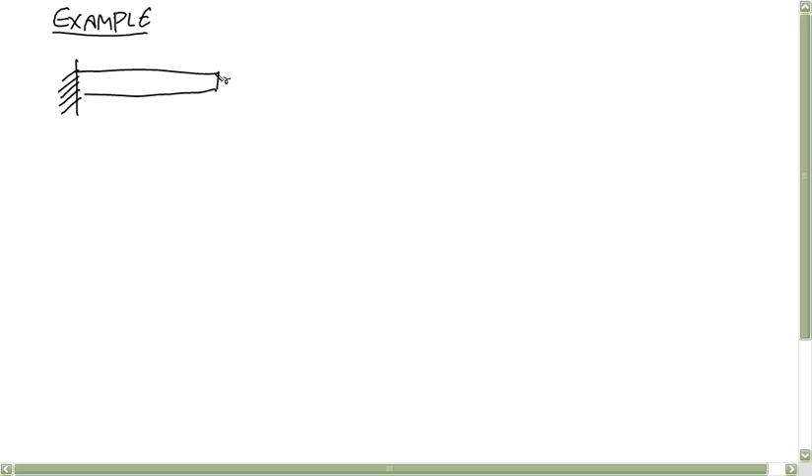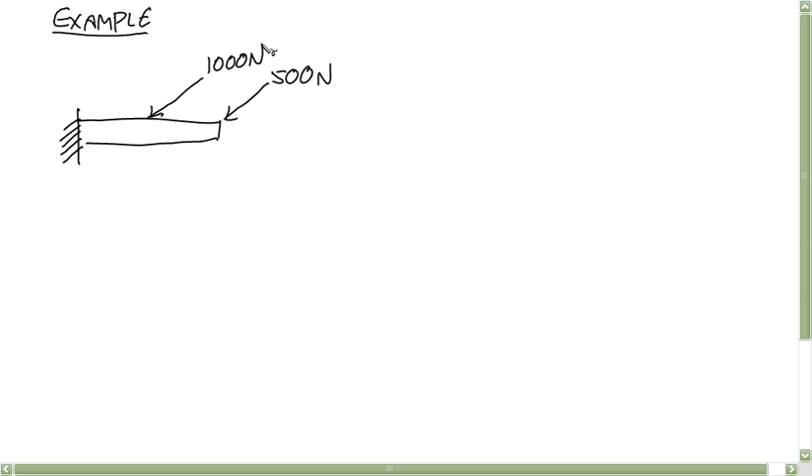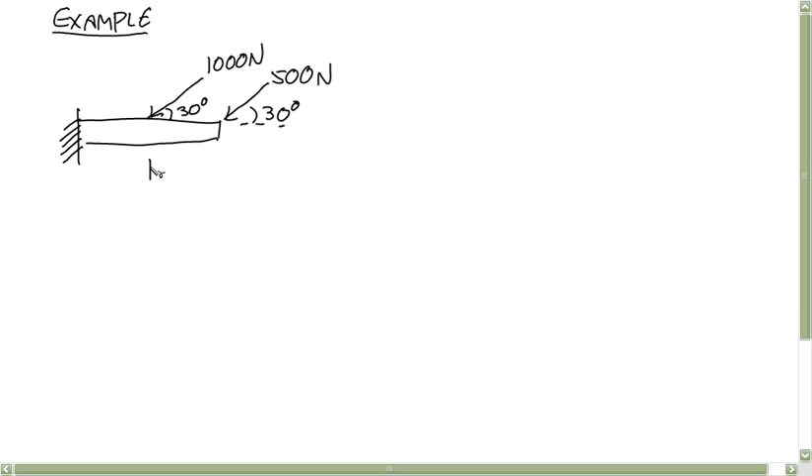Okay. So let's say that we have a cantilever beam that's straight. It's glued or fixed to the wall. It can't rotate or translate. And there is a force acting like this of 500 newtons and a force acting like this of 1,000 newtons. And each of those is at 30 degrees. And the lengths that we need: there's 1 meter from the wall to this first force and 1 meter from the first force to the second force.

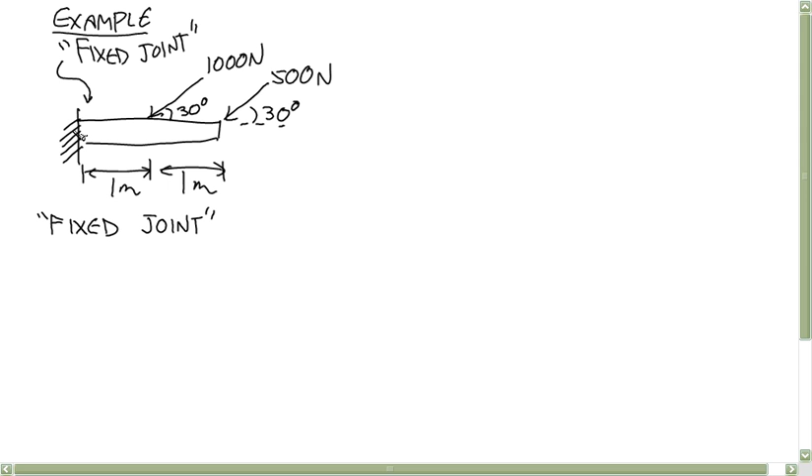And this joint is called a fixed joint. A fixed joint doesn't allow any translations, right? You try to move this thing to the left or the right or up or down, and it won't do it. And it doesn't allow any rotations. So it makes sense that in order to prevent translations, you're going to need to apply force components. And in order to prevent rotations, you're going to need to apply rotation components, moment components, okay? And it's actually couples. So a fixed joint applies a full force vector. What a full force vector is depends on whether you're in 2D or 3D. In 2D, that's just two components.

And a full couple vector. And because of that little example I did last time, when I talk about a couple, I'm just going to represent that as a pure moment that doesn't have an about point associated with it, okay? So that's just a moment that we're going to add to all the rest of our moments in the rotational version of Newton's law, no matter what we choose as our about point. So that's a couple.

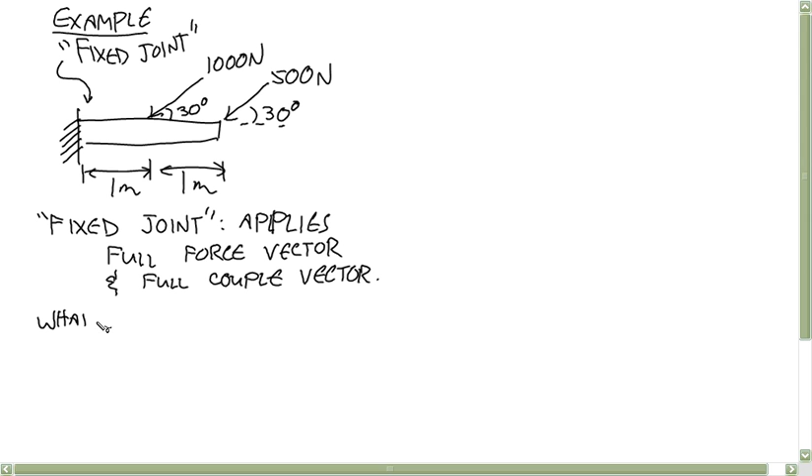And we want to calculate the reaction loads at the wall. What are the wall reactions? So we want to find that force vector, and we want to find that couple vector. In 2D, that couple vector just has one non-zero component, the z component. So it's 3 non-zero values that we want to find in a 2D problem. Okay, so before we can use Newton's laws, we have to start with a free body diagram.

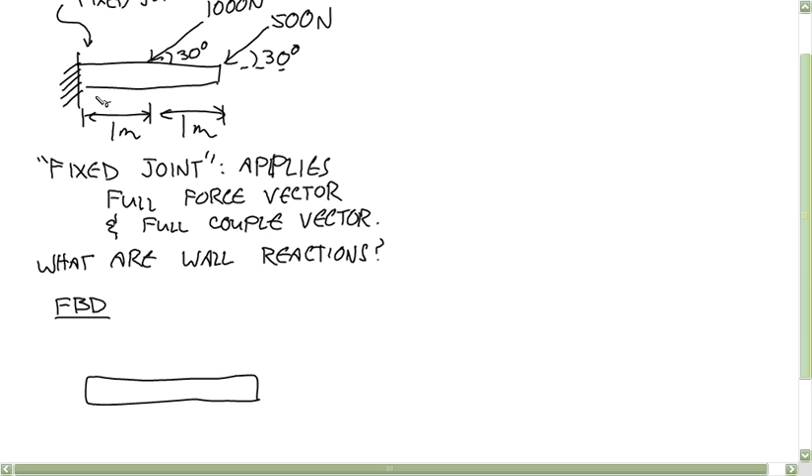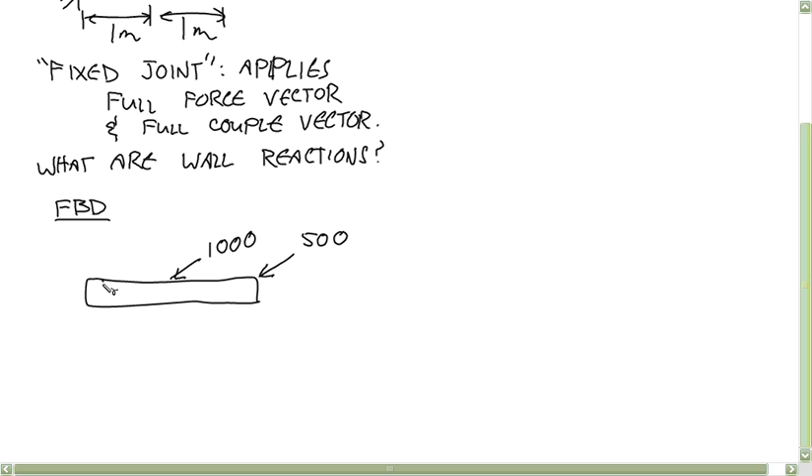And this is not a free body diagram, right? I said before that a free body diagram in this class has to be nothing but an outline of your isolated object with loads acting on it. So here's the isolated body, and the loads are 500, 1,000. And then I'll put a coordinate system here. And there's also a load, a force that I'll say is acting right there.

And that's the force applied to the body by the wall. Since it's an unknown force vector, I'm going to use that subscript notation: on the body by the wall. And then there's also a couple applied by the wall to the body. I'll represent it like that in 2D. In 3D, by the way, I'll represent couples like this with little doubled arrows. So that's if it's 3D. Okay, that's a full free body diagram.

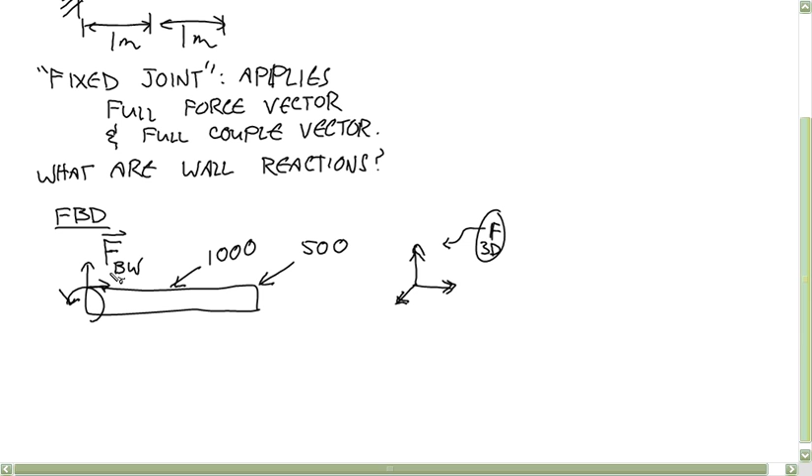So now we're going to go from here to Newton's second law and the rotational version of Newton's second law. In order to do that, I'm going to fill out that table that I talked about with moments, and we're going to see how filling out that table just makes it really easy to fill out the left side of both of those Newton's second laws.

Okay, so for each load on this body, we're going to enter where it's applied, the about point for calculating our moments, because we need to be consistent with our about points for all the moments. And then the rho vector, which is p minus a.

Then the force vector, and then finally the moment about a. So I'll just start over here and work my way to the right. I guess I'll start with that couple. I haven't named it yet. Let's call that M, the moment on the body by the wall.

Okay. And in fact, so when I use couples, if my couple is represented as a vector variable like this one is, well, I'm being a little, in 2D, the equivalent of a full vector unknown couple is just a single value. So I'm writing this as just a scalar, but anyways, couples also obey Newton's third law. So if you have a couple applied to B by W, that's equal to negative couple applied to W by B. And that's why I'm going to use that subscript notation on the couple. And it makes sense that that would hold, right? Because these couples, even though we're treating them as just pure moments, they really are just combinations of forces. And you know that equal and opposite applies to every force, so it has to apply to the couples as well, right?

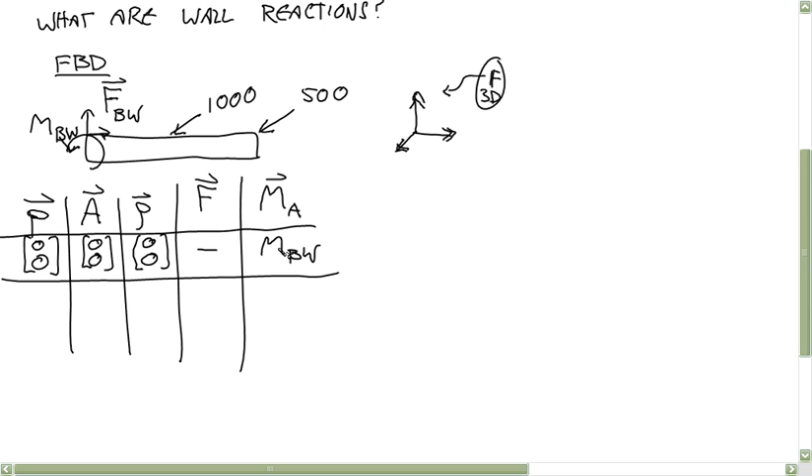Now we'll go to FBW. That also is applied at the origin. The about point. Now notice on any one of these tables associated with a free body diagram, your about points for every load are going to be the same thing, right? So rho has to be zeros. The force vector here is FBWX, FBWY. And then the moment applied by that force about, yep.

Now this force, that acts at 1, 0, right? 1 meter over. The about point still has to be 0, 0. And of course, you don't have to, there's nothing that says your about point has to be the origin, okay? We could have made the about point 50, 50 or something. The one thing you just do have to do is whatever your about point is for this, it has to be the same for this and this and this. So 1, 0 minus 0, 0 is 1, 0.

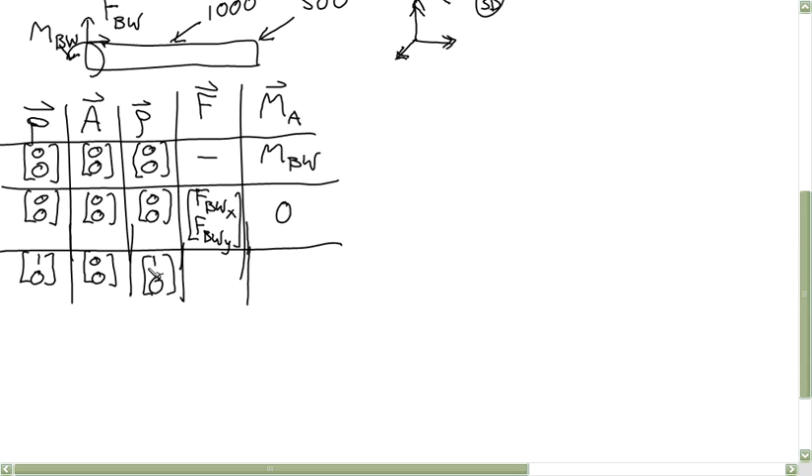That force is, since that's 30 degrees, we have negative 866, negative 500. And now this is going to be our first non-zero moment about A. 1 times negative 500 minus 0, so negative 500.

And then the last one is this 500 Newton force. That's acting at 2, 0. The about point is still 0, 0. Rho then is 2, 0. If you do that trigonometry for that 30-degree angle, you get negative 433 and negative 250. So 2 times negative 250 minus 0, so another negative 500.

Any questions so far filling out that table? Any statements of fact or frustration? Humiliation? Mike? No? Not yet. Okay.

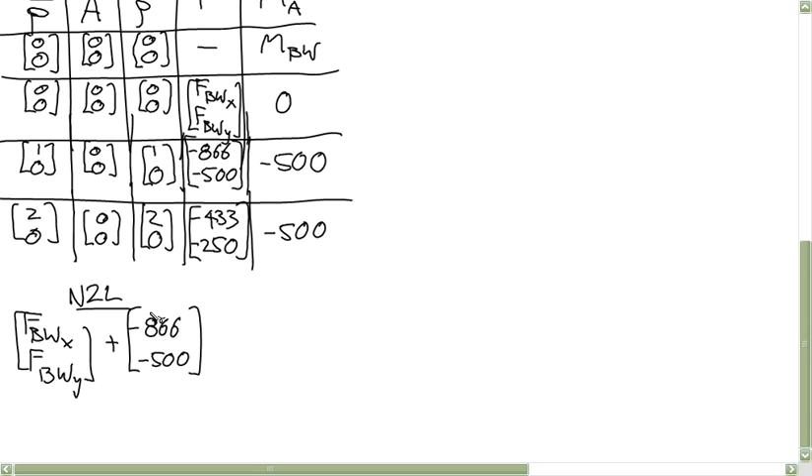All right, so now we're going to go from the table to the two versions of Newton's second law. First, the translational Newton's second law, the real Newton's second law. And in order to put these force vectors on the left side, you're just going to go straight down the force column of this table. So we have FBWX, FBWY plus negative 866, negative 500 plus negative 433, negative 250. That's all the forces. So since it's in static equilibrium, that's all equal to 0. Otherwise, it would be equal to ma.

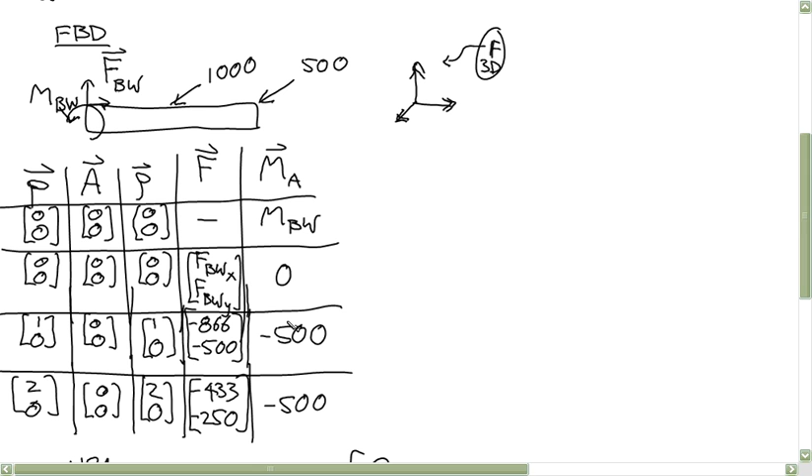And then the rotational version of Newton's second law about A. Now we're just going to go down this side. If it's a 3D problem, these will have to be represented as vectors. In a 2D problem, in my other examples, I put everything as 3D vectors with just zeros in the z component, where the only non-zero component was in the z, right? So it's fine with me either way you represent it.

So for the left side of this, we have MBW minus 500 minus 500 is equal to 0. So that's 3 equations, 3 unknowns. And this one you don't have to really solve as a system. Every equation just has its own variable.

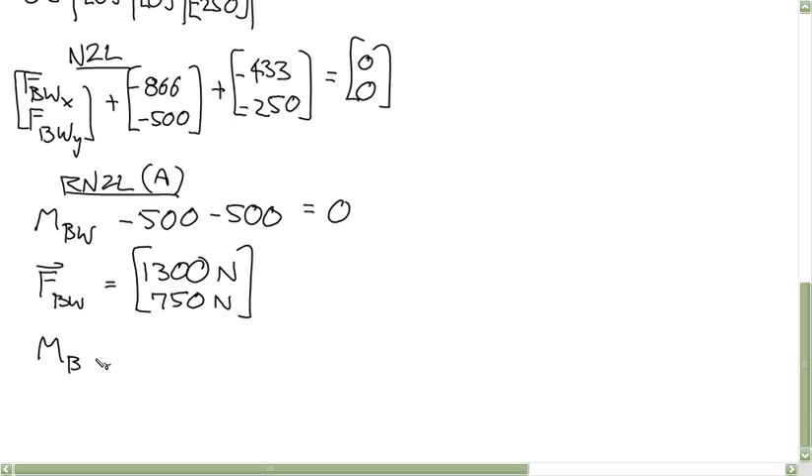So we get the force vector FBW is equal to positive 1300, positive 750, and that value, the value of that couple, the moment produced by that couple, MBW, is equal to 1,000 Newton meters. Okay, so

Let's interpret this. This force on the body by the wall is mostly to the right, and also somewhat up, right? So let's look at the picture and make sure that makes sense. These forces are pushing down and to the left. So in order to counteract that, there have to be forces to the right and up. So that makes sense, right?

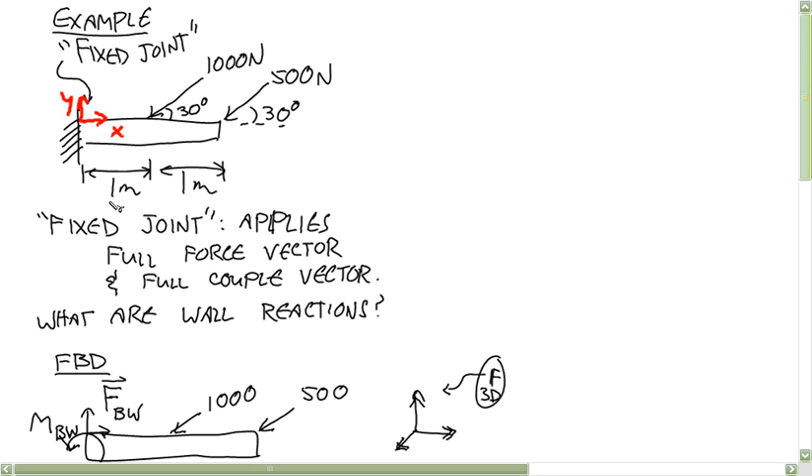And then look at the couple that's applied. Well, both of these, you can imagine, would tend to rotate this body this way, which would be a negative moment component. So to counteract that, we need to apply a positive moment, a counterclockwise moment. And that's what we have. Positive couple applied by the wall.

And then if you wanted to know what's the force applied to the wall by the body, it's just negative of this. So negative 1,300 newtons, negative 750 newtons. And how about what's the moment applied to the wall by the body? That's just the opposite of this, negative 1,000 Newton meters.

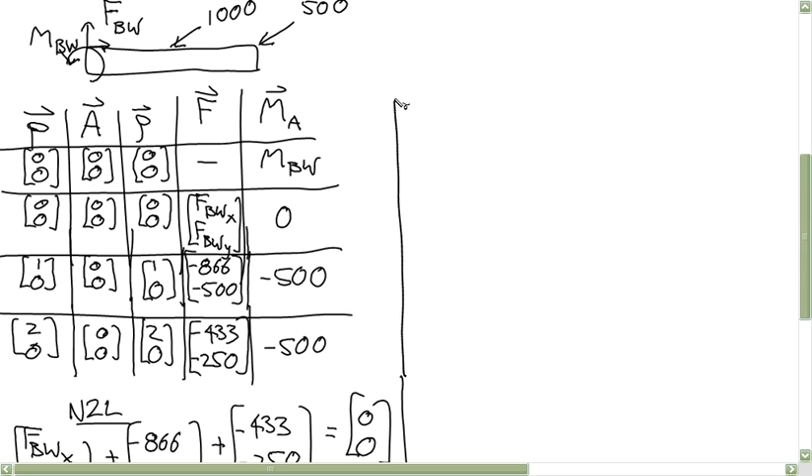All right, let's do another example. So this time, we have a beam that's attached to the ground by a hinge joint on the left, and it's attached to the ground by rollers in the middle. Between the end point and the roller, we'll say is 1 meter. Between the rollers and the other end point is another meter. And let's say that there is a force applied at the end at an angle of 45 degrees of 1,000 newtons.

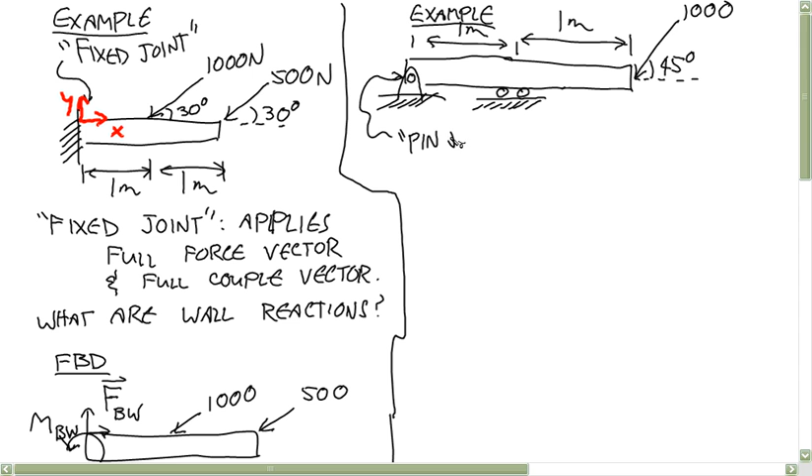Over here, this is a pin joint, and this one is a roller. So in order to figure out what kind of loads those two joints, the pin joint and the roller, apply to that body, we need to think about how motion is restricted by that joint. The pin joint, it lets any rotation happen, right? So it's not going to apply a couple, but it doesn't let this beam translate this way or translate this way. So this pin joint is going to apply a full force vector to the body.

And this roller, if this joint wasn't here, it would allow rotation. I guess you sort of have to think of this as maybe a single point, even though they'll often be drawn with multiple wheels or something. You can just think of it as like a single point that it's making contact, okay? And at that single contact, this body would be allowed to rotate, right? So it's not going to apply a couple. This body would also be allowed to translate side to side, left to right, but it wouldn't be allowed to translate up and down. So this roller just applies a single force component, a force along a line, and this might take a little thinking to make sense of this, but it applies a force along a line that's normal to what it's rolling over, okay? I'll say normal to the ground.

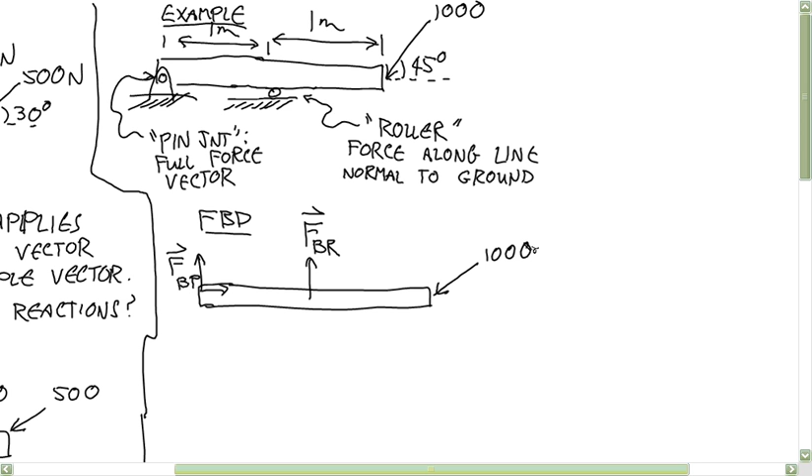So now we can go to the table. So first is the point where the forces are applied, the about point, rho vector, force vector, moment about A.

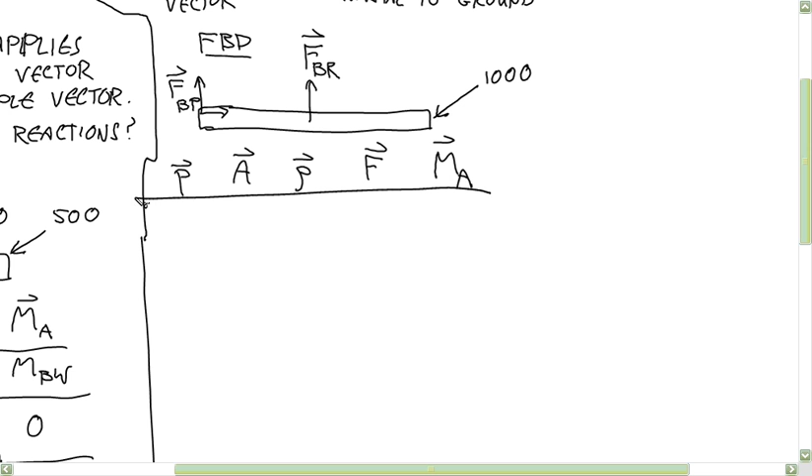We have to choose an about point. By what I said last time, it would make sense to choose an about point here or here. I'm going to choose this one. Can anyone think of a reason why? Two variables? Yeah, two variables. So there's two variables we're getting rid of if we put it here in the moment equation, as opposed to one variable here. Exactly. So our about point is going to be, I'll put the coordinate system here again.

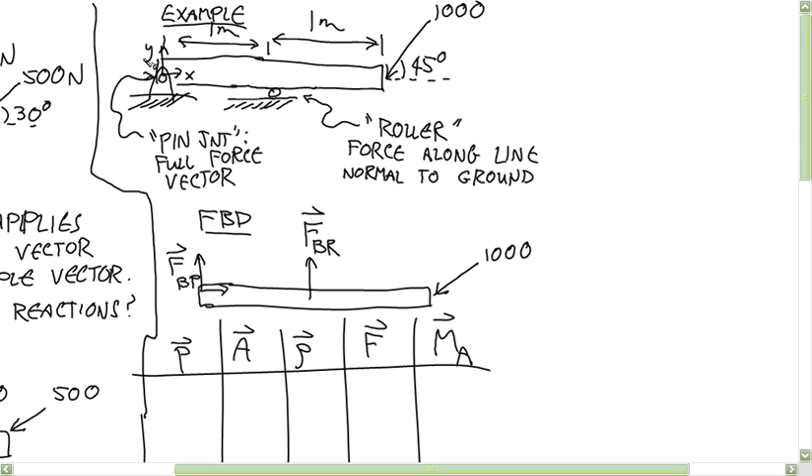So our about point is going to be 0, 0, 0. I'm going to write it all in vector form this time. It means the same thing as the form of the previous one. This force, FBP, is applied at the origin. That means the rho vector is zeros. The force is FBPX, FBPY, 0. And the moment is 0, 0, 0.

Now the force from the roller, that's applied at 1, 0, 0. The about point is zeros still. So the rho vector is 1, 0, 0. That force vector is 0, FBR, 0. And so the moment about A is 0, 0, FBR.

And then last, this force on the end, that's applied at 2, 0, 0. About point stays the same. The rho vector is 2, 0, 0. The force is negative 707.1, negative 707.1, 0. And so that moment is 0, 0, negative 1414.2.

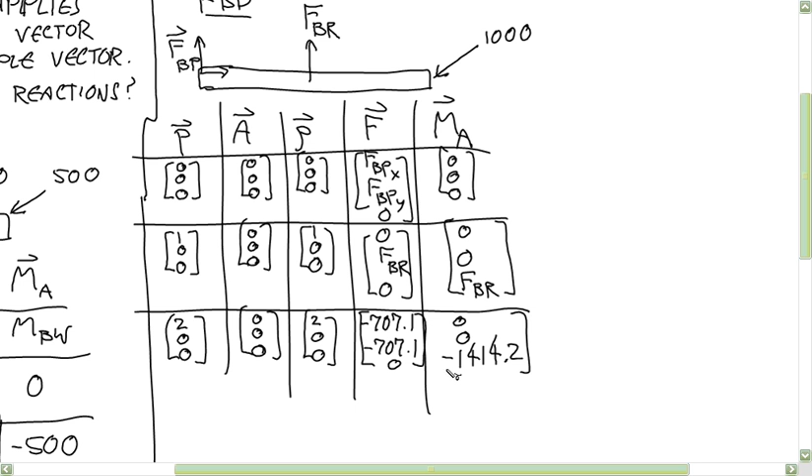All right, so now Newton's laws. First, we're just going to go straight down and add up the forces. So we have FBPX, FBPY, 0, plus 0, FBR, 0, plus negative 707.1, negative 707.1, 0, equals all zeros.

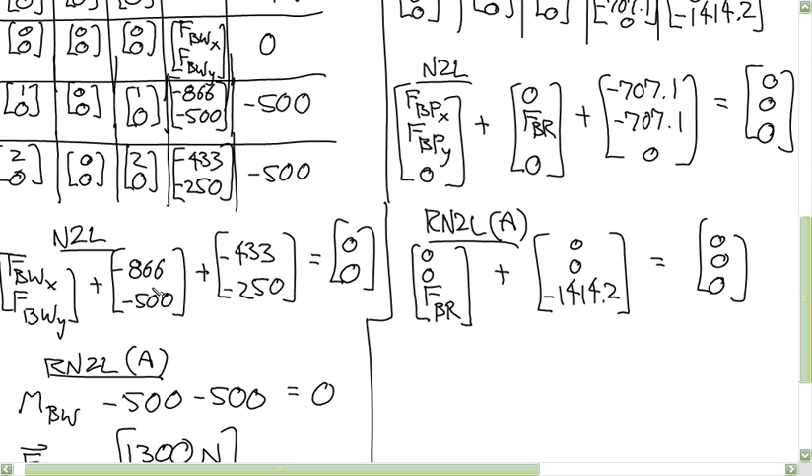And then rotational Newton's second law about A. We have 0, 0, FBR plus 0, 0, negative 1414.2 is equal to 0, 0, 0. I did it in vector form that time. You can see it comes out giving you the exact same information, even though we did it as a 3D problem. So we have 6 equations. 3 of those 6 equations are useless because there's nothing but zeros in them, and we just end up with exactly the same thing we ended up with doing it as a 2-dimensional force vector and a 1-dimensional moment vector.

So solve this system. This time, it's a system, but it's simple. You can still do these easily by hand, but I would get in the habit of entering these as matrix equations. Just make sure that you know how to do that on your calculator. But the solution comes out to FBR is positive 1414.2 newtons, and the force vector on the body by the pin is positive 707.1, negative 707.1.

Okay, so that one at first glance isn't quite as obvious, but it makes sense if you think about what's happening physically. These two forces together have to counteract this force, right? But since this one can only act as sort of a fulcrum for this end, on the left it also has to fight this rotational tendency produced by this one. That's why you end up with the downward force component at that left end side.

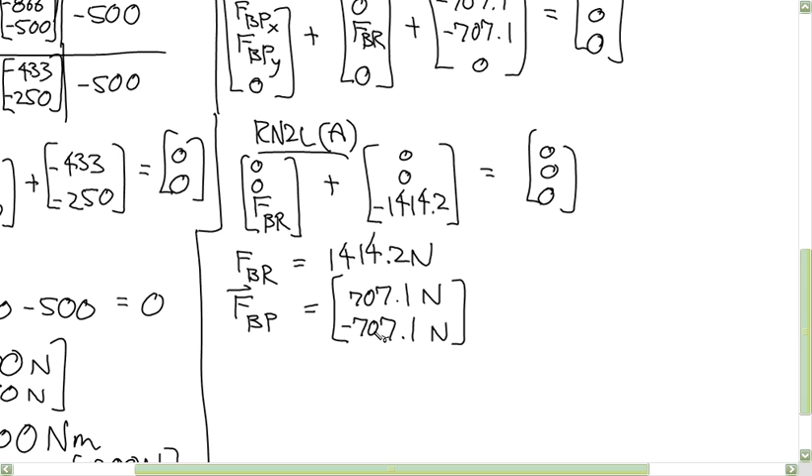Isn't the Y component, does have the FBR in it too? Yeah, that's right. This force FBR, the force vector FBR, is just upward. It's a 0 x-component and a positive y-component of 1414. So it's pushing up. And yeah, mathematically, you could say that's the explanation, but at first glance, yeah, okay.

All right, so these two examples, besides just being practice at seeing we're going to do this type of stuff over and over again, you can see that setting up the free body diagrams and setting up Newton's laws depends on representing these joints correctly, right? If we, for example, had treated this joint as if it produced a couple, we would have ended up with an indeterminate system, and that's a problem.

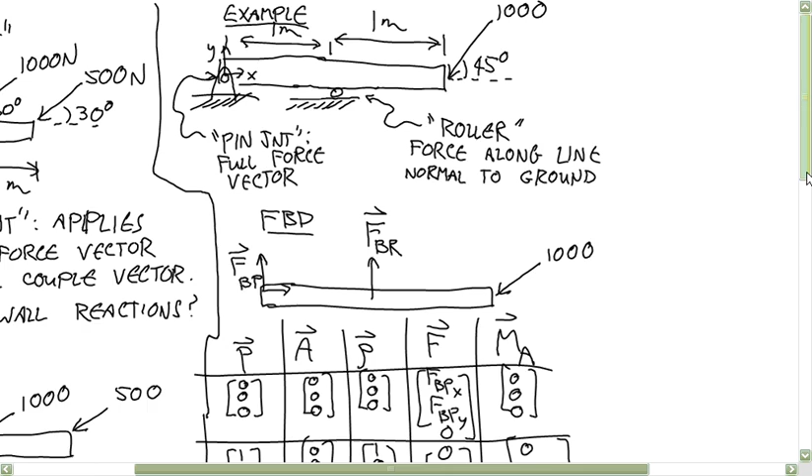So solving these problems requires treating the joint loads correctly. So now I'm going to talk about how to know what loads are applied by what joints.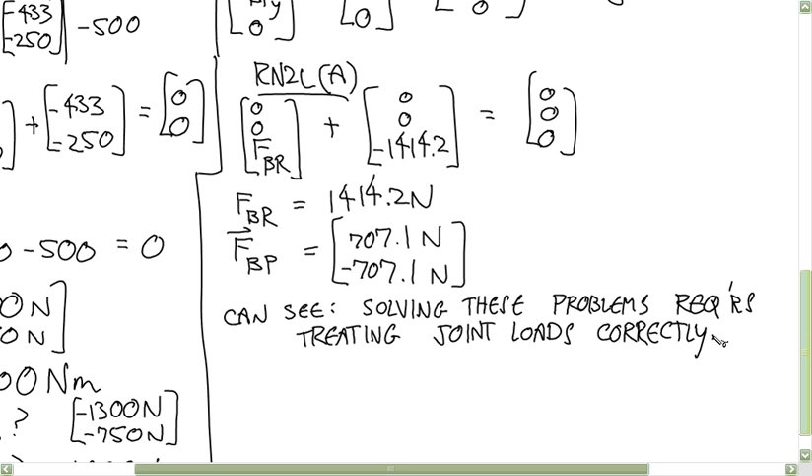Any questions before I go on to this about either of those two problems? So think of a joint, for our purposes, not as something that allows certain motions. Think of it as something that restricts certain motions, okay? So think of a joint as something that restricts the motion of some chosen body relative to another body. Often that other body is going to be the ground, but sometimes it's going to be something else.

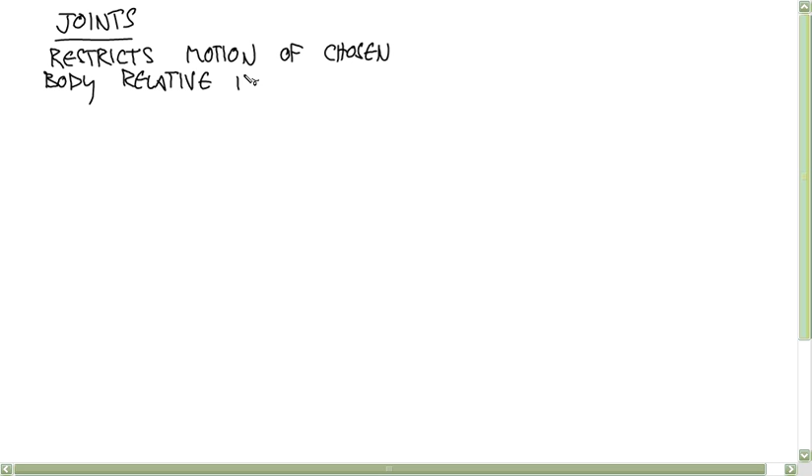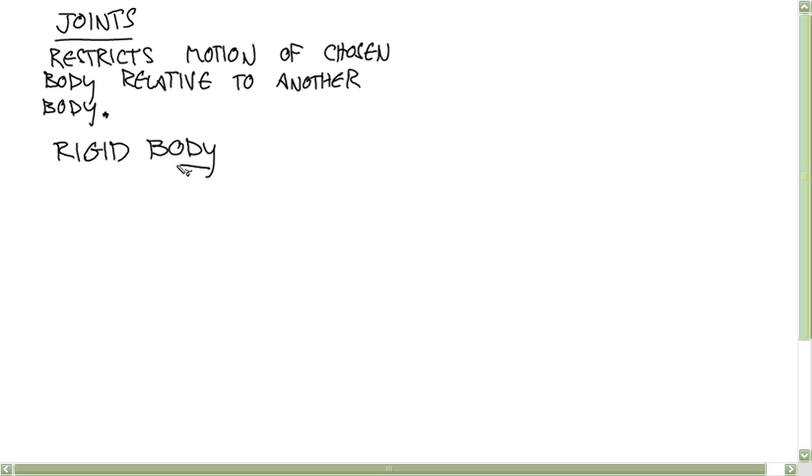So what if there's no joint? What kind of motion is allowed by a body that's totally free? So a rigid body in 2D has 2 degrees of freedom in translation. It can move in translation along the x-axis or translation along the y-axis. And it has 1 degree of freedom in rotation. It can rotate this way, okay? In 2 dimensions, this thing can't rotate about the x-axis or the y-axis.

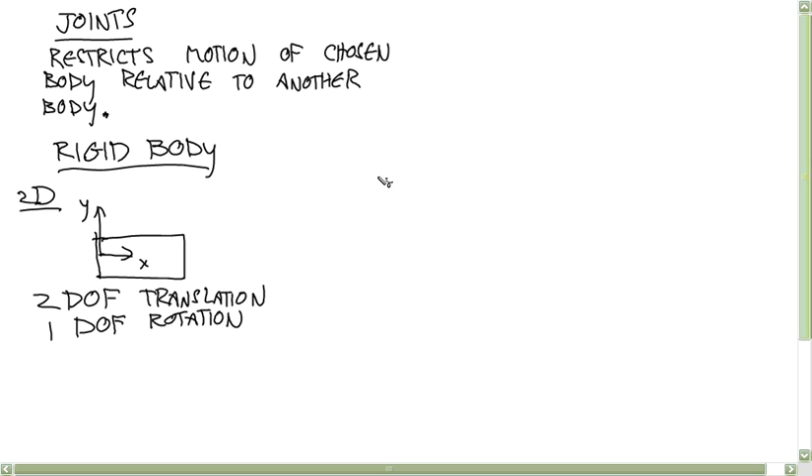So this is 2D. In 3D, this is harder to draw.

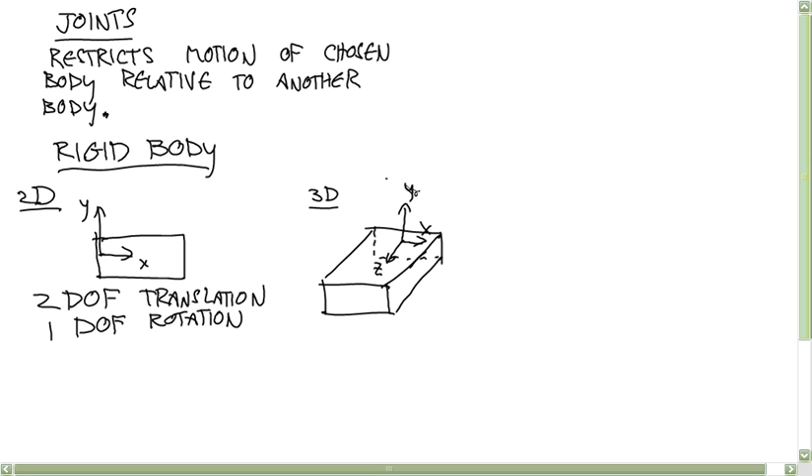So say there's your X, there's your Y, and there's your Z. You have 6 degrees of freedom because you can translate along X, Y, or Z. You can also rotate about X, Y, or Z. So this one has a total of 3 degrees of freedom in translation, and another 3 in rotation. That gives you a total of 6 degrees of freedom.

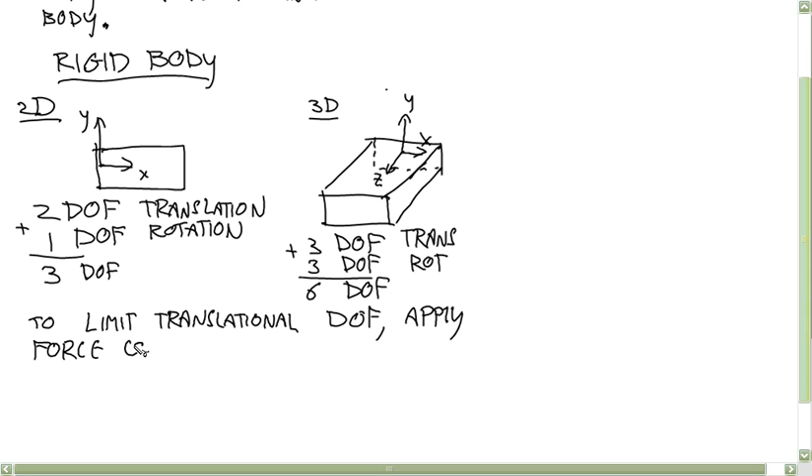To limit translational degrees of freedom, in either case, you have to apply a force, a component of a force, along that chosen axis. And to limit rotational degrees of freedom, you have to apply a couple component.

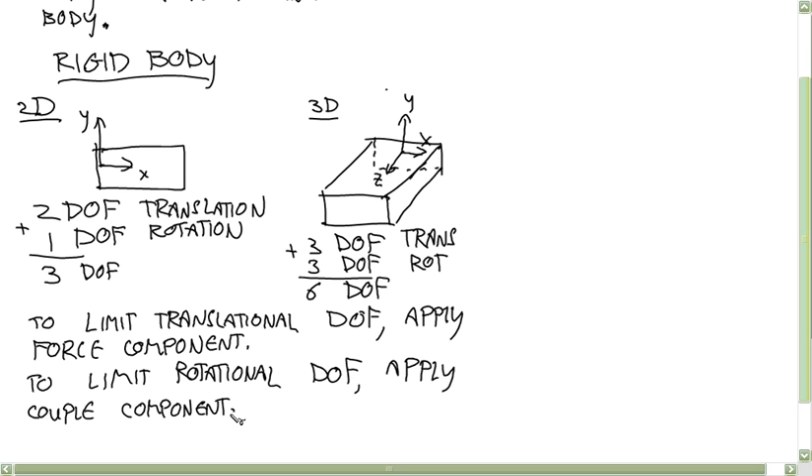Okay, so there are a bunch of types of joints that we're going to see a lot of. Here are some of them. Some you can use in 2-dimensional problems. Some only make sense in 3-dimensional problems. Some sort of make sense in either.

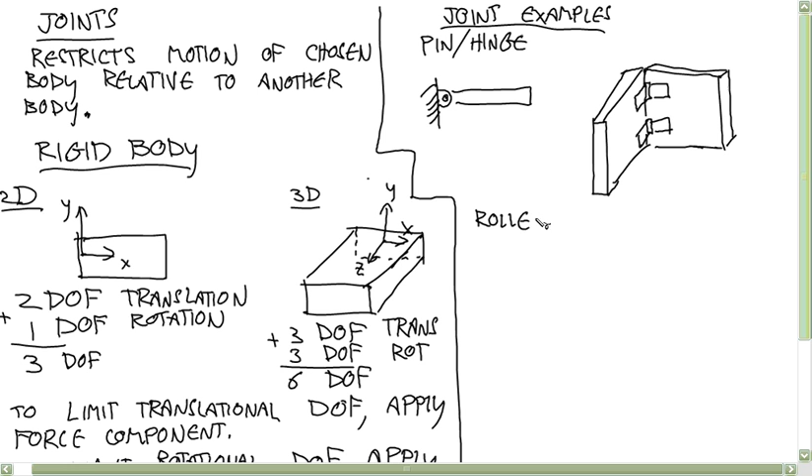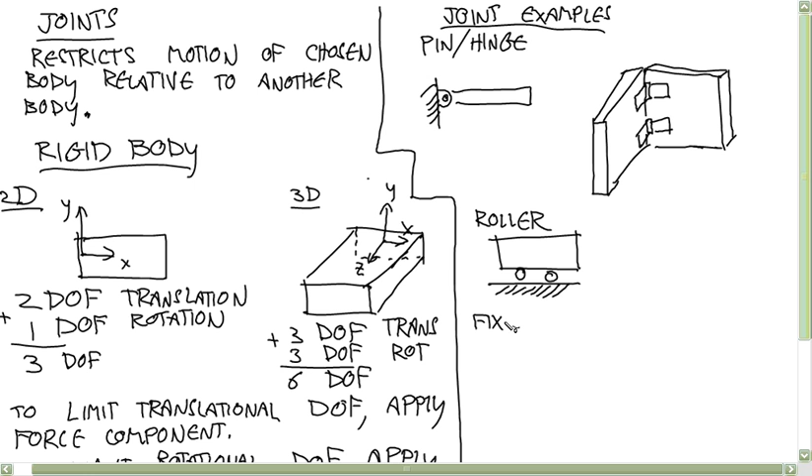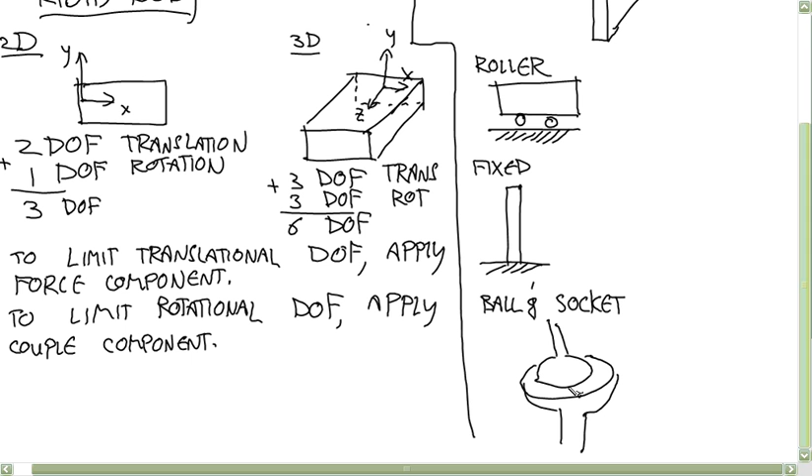Then there are rollers. We'll see tons of those. You can have these in 3-dimensional problems too, but I'm not even going to try to draw that. In a 2-dimensional problem, it'll look like this. There's fixed joints. We'll see a lot of those. I've already done a couple of those, but it'll look something like that. And then one that only makes sense in 3 dimensions is a ball and socket joint.

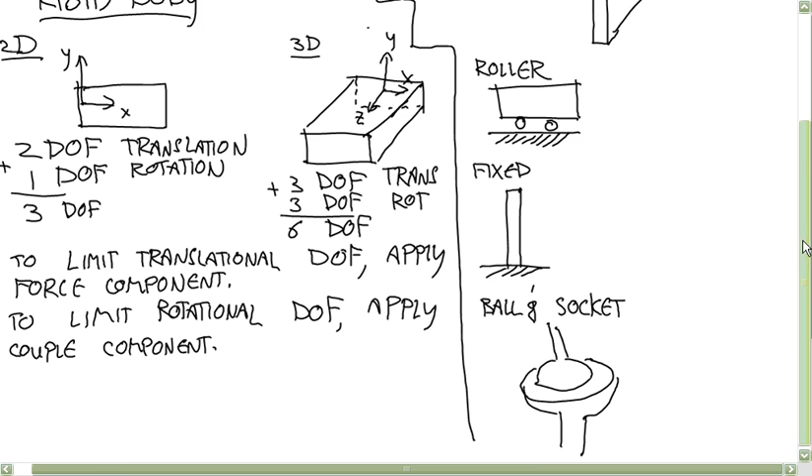So these aren't all the joints we'll deal with, but these are the most common ones that we'll see. And you can imagine that each of these limits motion in a different way. We saw that with those two example problems. A pin joint limited motion in a different way than the fixed joint did.

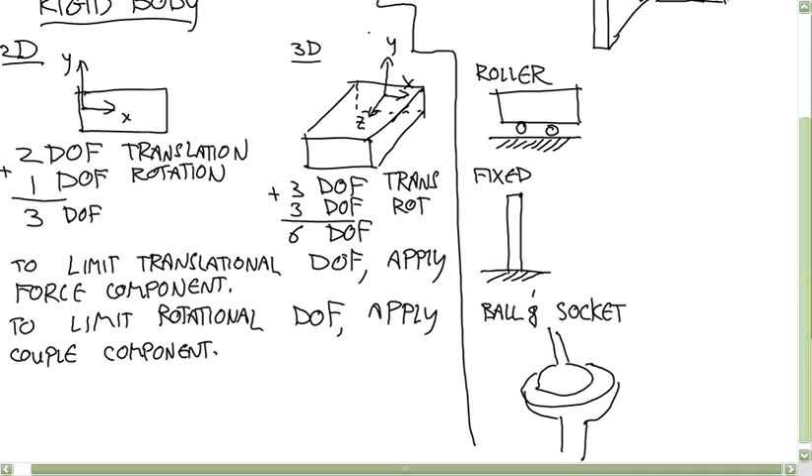Okay, so what loads do they apply to the chosen body? I mentioned this before, but remember that these loads are defined by the motions they prevent, not the motions they allow, okay? So that means when you think of a pin joint, don't think about the fact that it can rotate. Think about the fact that this body can't translate this way or this way, okay? And when you think of a roller, don't think about the fact that it can rotate or slide this way. Think about the fact that it can't drop into the ground or jump out of the ground in most cases.

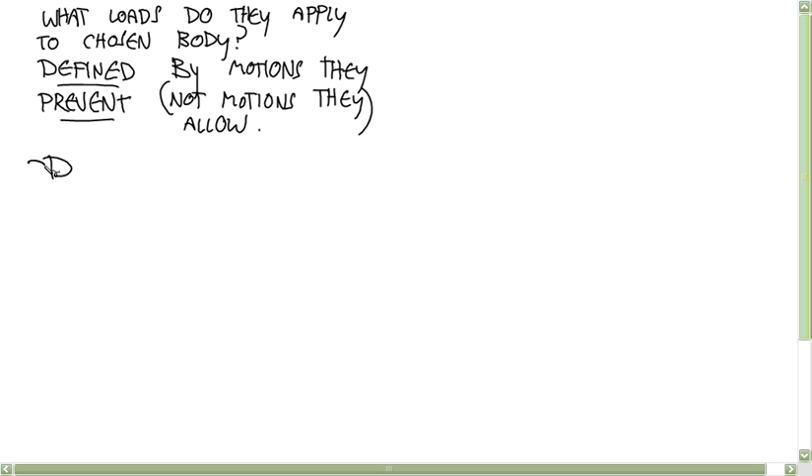Okay, so first, let's go through some of the two-dimensional joints. And first, let's start with a whole set of things that you'll see in drawings and they look different, but they all actually do the same thing mathematically: rollers, frictionless surfaces - emphasize the less, because we're going to see friction surfaces with friction in a minute - a collar on rod, you know what a collar on rod is? Like this is rod. And I don't know, his mom doesn't trust him at the mall. Poor Rod. A pin in slot. Okay, so those are the ones that we're going to start with.

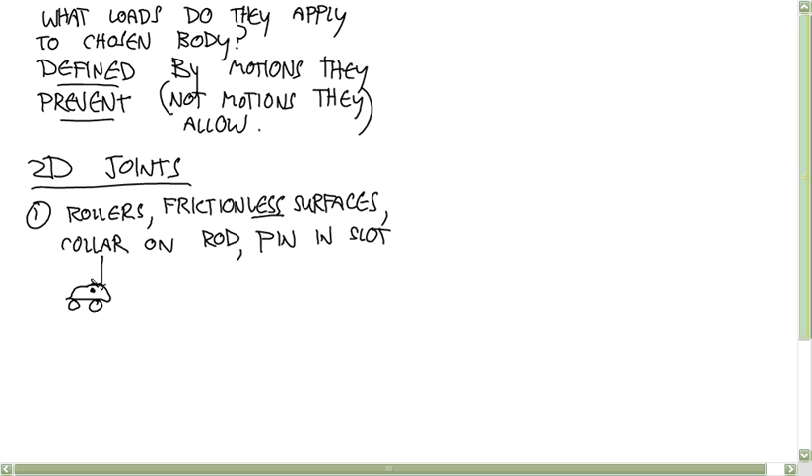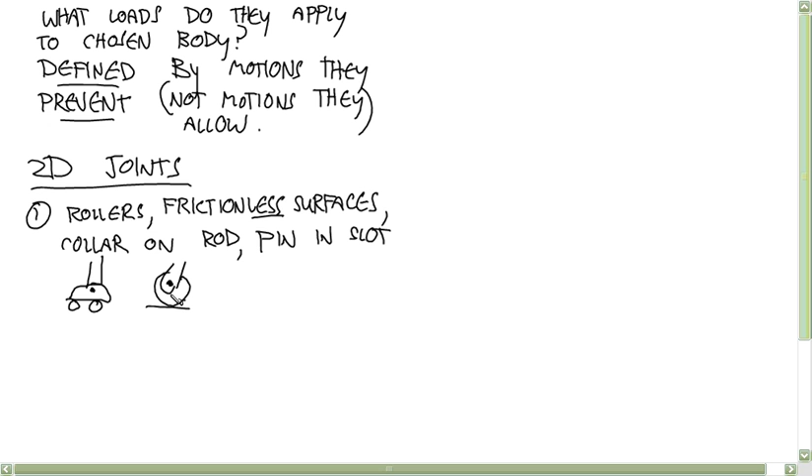Rollers, you'll see in pictures like this often, like a little roller skate under something. You'll also see it as just a wheel. That's, I guess, what I ended up doing in my example. So those are rollers.

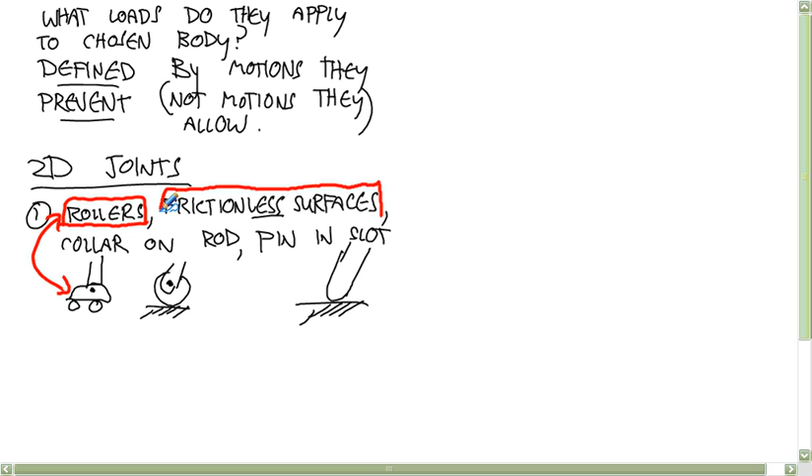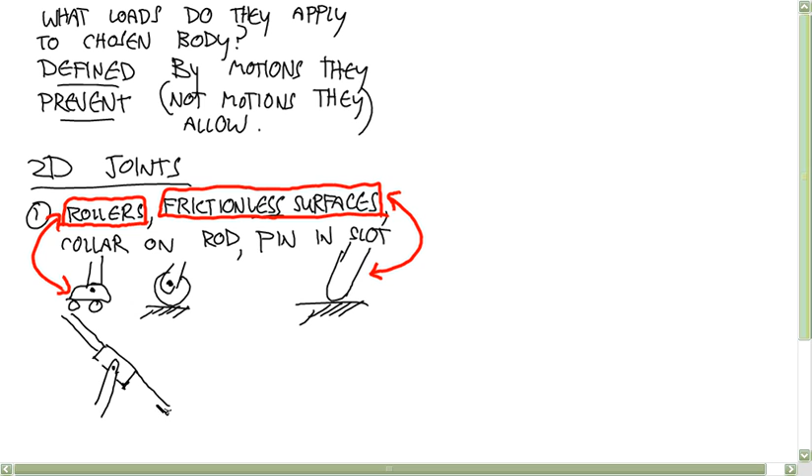Frictionless surfaces, you'll just see the surface and an object that ends like that, and it'll say something in the problem about it being frictionless. A collar on rod, a second definition, is you have something like this, sliding over the rod. Okay, so this collar can slide up and down that rod.

And then a pin in a slot will look something like this, where this pin allows this arm to slide back and forth.

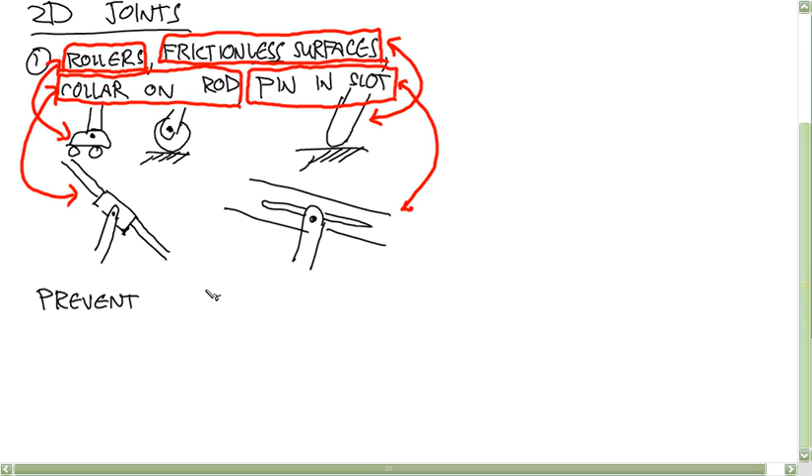Mathematically, you treat all of these the same. All of these allow rotations, and they allow sliding back and forth. But I'm not going to write that, because you don't want to think about them in terms of what they allow. Think of them in terms of what they prevent. So what they prevent is any kind of translation normal to the path of whatever the sliding, rolling thing is.

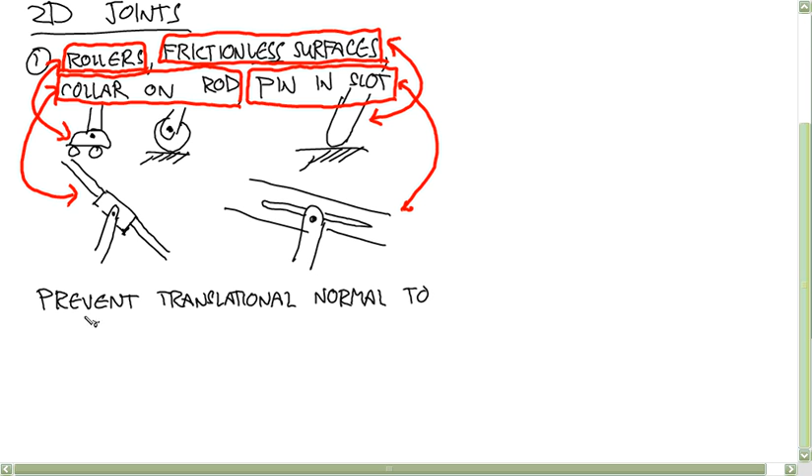So what kind of load would you expect that joint to apply to the body? The only thing it prevents is a known direction of translation, so it's just going to apply a force in that known direction. The force component is going to apply a single force component perpendicular to the surface, perpendicular to this path, perpendicular to the ground here.

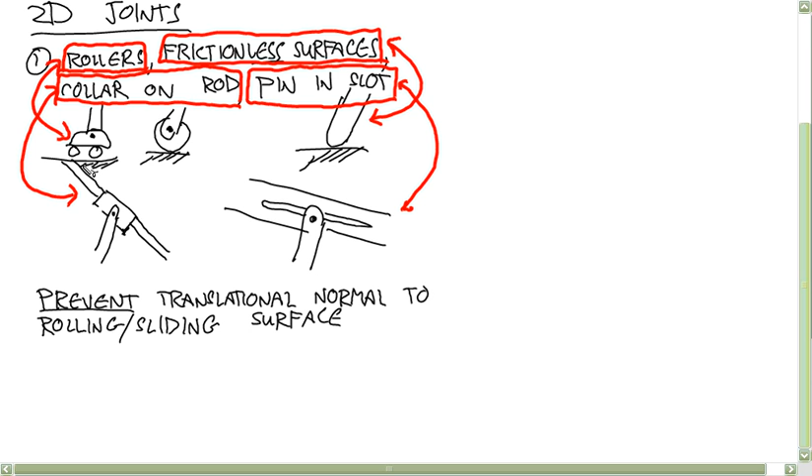So the applied reaction load is a force in a direction normal to the rolling or sliding surface.

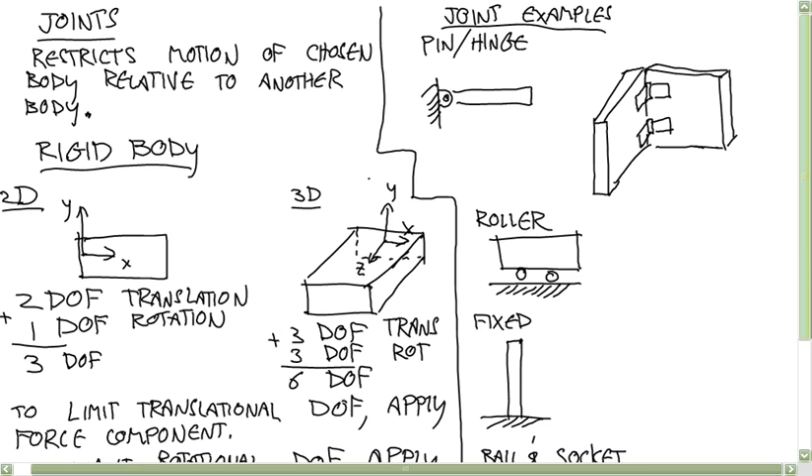That means that often, like we had in our examples, that rolling or sliding surface is going to correspond with an axis of your coordinate system. And then you can just treat it like I did in the example, when I used this roller, I just represented it with a y component of force. I could do that because my y-axis corresponded to the normal to that surface, okay?

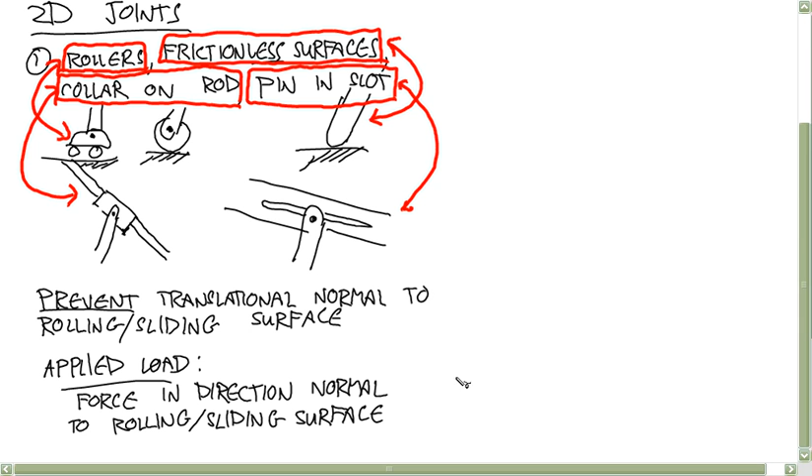But that won't always be the case. So if it's not the case, then you have to do it using a unit vector and represent that force as an unknown scalar variable times a unit vector that represents a normal to the surface. Anyone have any questions about that one?

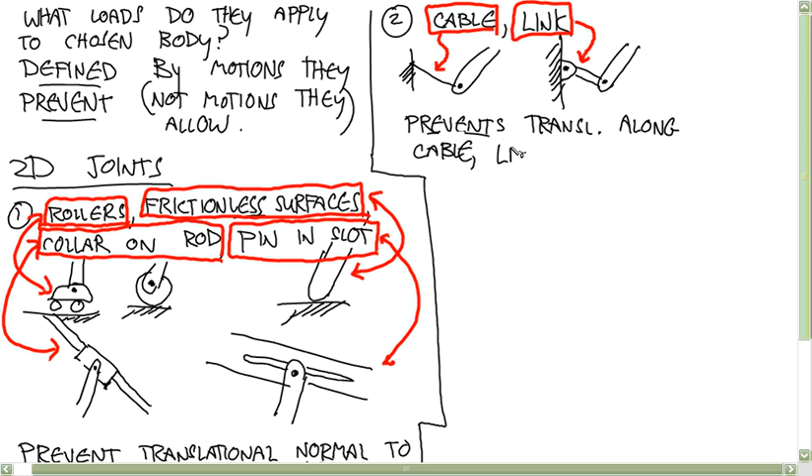What kind of motions do these prevent? One direction, right. It only prevents translation in the direction of that cable or link. Along a line... there's got to be a better way to say this, but parallel to the cable or link. How about just along the cable or link? So it prevents a translation with a known direction.

That means it's going to be only one force variable that we're going to use. So the applied load is a force parallel to the cable or link.

Okay, so there's a difference between these two things. I'm not going to really go into how to do this, but I want you to recognize this fact: the difference between these is if you try to push these two bodies together, the cable just folds and the link prevents it. So how do you think you treat that mathematically?

You probably did stuff like this in physics. All you do is calculate the tension, assuming that it's going to be in tension. Say you're trying to calculate the force this cable's applying to this body. You know the force has to be pointing this way, so you make that your unit vector pointing this way, and calculate the cable tension. If you come out with a cable tension that is negative, then you know your system just isn't going to work. You can't build a system like that that's going to stay where you want it to stay. That's the only way to do it.

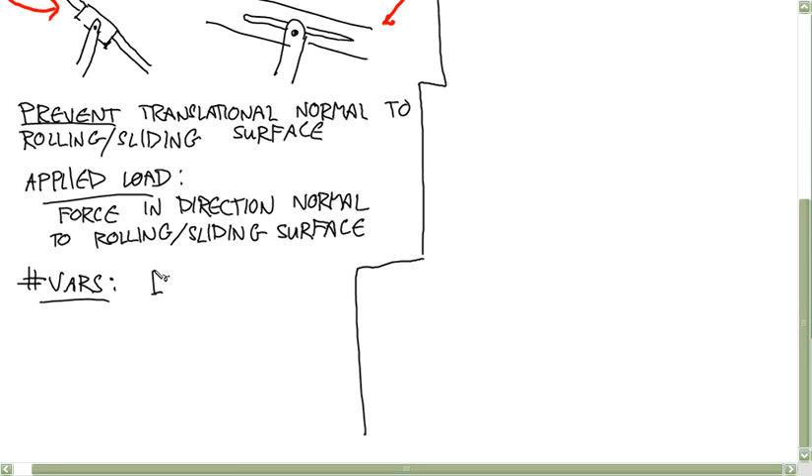Okay, how about this one? Again, we have a force that we know the direction of, we just don't know the magnitude of. So it's going to be 1 again.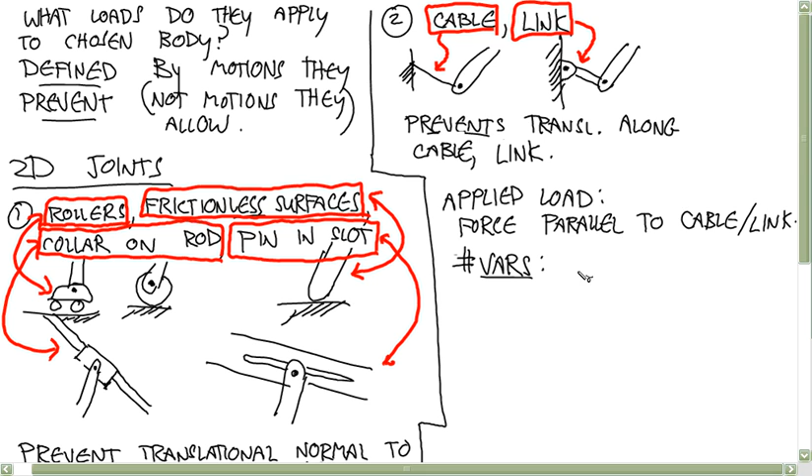The third type of joint is a pin or a surface with friction. These two are going to be treated mathematically the same. So the pin joint will look something like that, something we saw already. Surface with friction will look just the same as a surface without friction. It'll just say in the problem that you have to worry about friction in this case.

Okay, what motion does it prevent? That's right, it prevents translation along either dimension, either axis. So any translation. And in order to prevent any translation, what kind of load do you need to apply? A full force vector. If you only apply one component of force, then you're free to move perpendicular to that force. If you apply two components of force, then you're restraining this thing from moving in any combination of those two, which is anywhere. So the applied load is a full force vector.

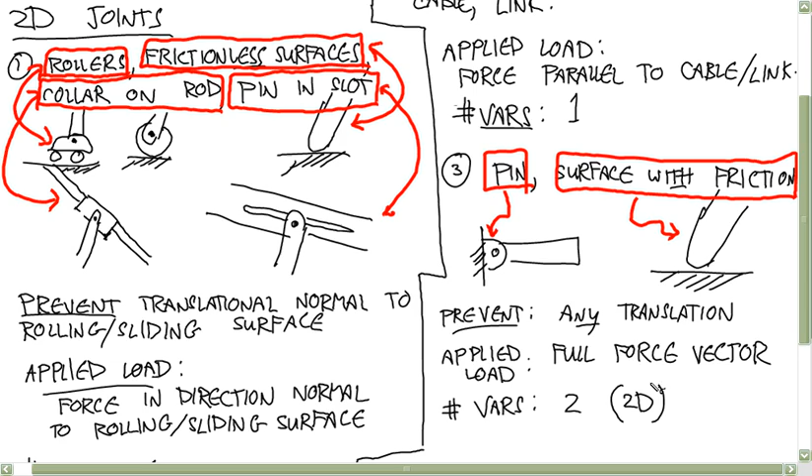Okay, so now I'm not going to go through these. The textbook has these all in them. But I just want to draw a couple of 3-dimensional joints, and I want you to work together, talk to each other, and try to figure out what type of loads represent each of these joints.

Oh wait, sorry, I missed one. I missed an important one. Sorry about that. First, I want to do fixed joints. We'll see those all the time. So it looks like that.

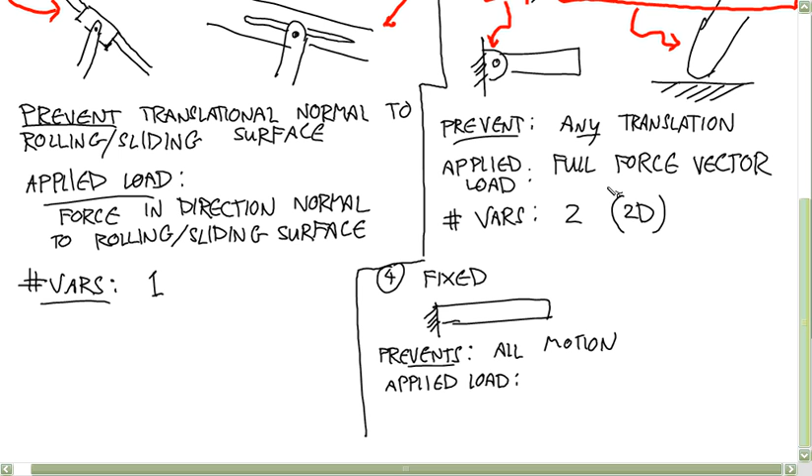It prevents any kind of motion. So what kind of reaction loads does this apply? It prevents all translation, so we know it has to apply those two force components. It also prevents rotation, so it applies a couple also. So a full force vector and a couple.

And so how many variables do you need to represent this one? 3, right. And notice this: we only have 3 equations in 2D, right? The only equations we have to work with are Newton's second law and rotational Newton's second law. So that means that if you have a fixed joint and you don't know the reactions, you can't have any other joints in there. You can't solve for anything else. Your 3 variables that go with your 3 equations are already used up, okay? So if you have something with a fixed joint and also a pin joint to something else, you can't solve for that, isolating that body alone, okay?

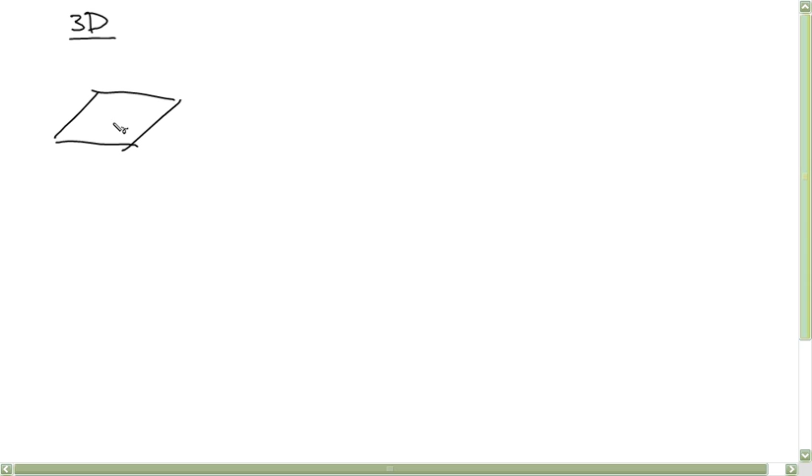All right, now let's go to 3 dimensions. So first, how about a fixed joint in 3 dimensions? Looks something like that.

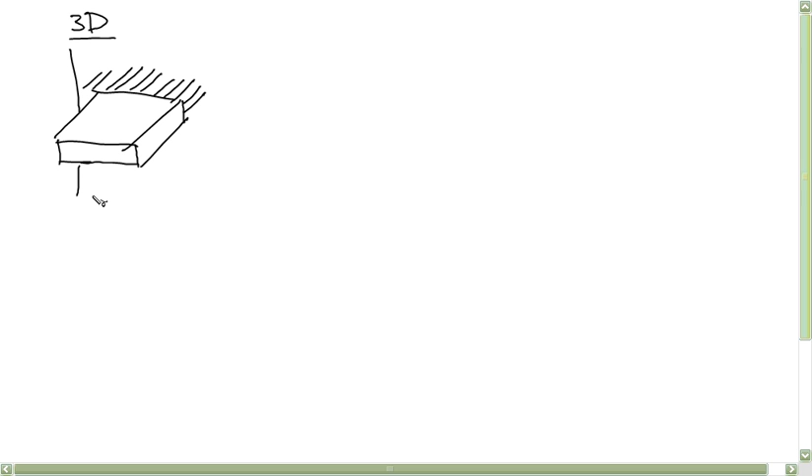What do you think - think about it the same way. What motions does that fixed joint prevent in 3 dimensions? Everything. So what type of loads need to be applied to prevent any kind of motion in 3 dimensions? Yeah, all of them. So this time it's just 6, right? So I'll say a full force vector and a full couple vector. Anyone have any questions about that?

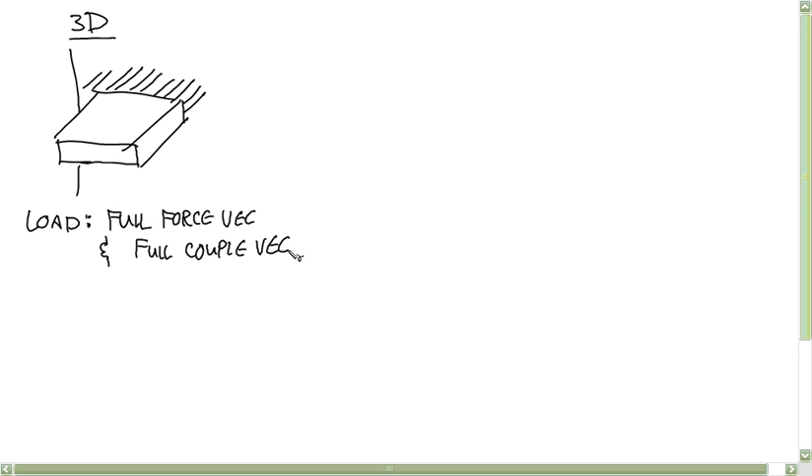Okay, second, how about a ball and socket joint? I just keep doing these because I like drawing them. There's the ball. Here comes the socket.

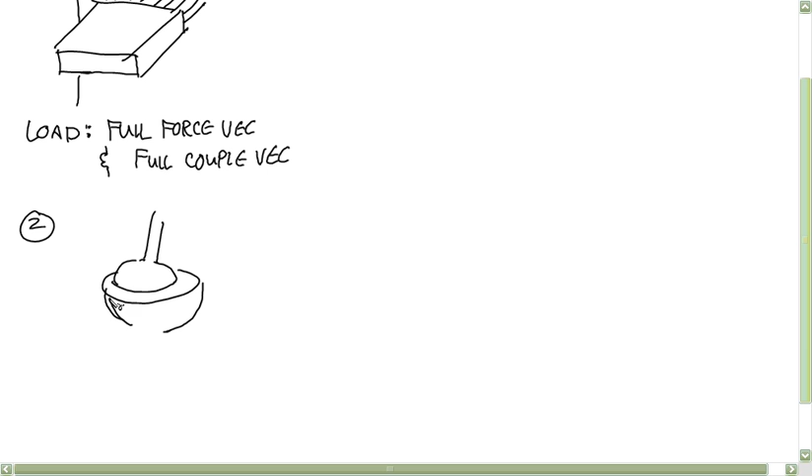Okay? So, what do you think about this one? Just a 2D force vector, isn't it? Or does it prevent everything? Everything. It prevents every translation. So if it was only 2D, say, from this drawing, it looks like it might only be 2D.

I mean, if you pulled on it, it looks like it would come right out. But say your coordinate system is like this. Think of it pushing in, and then it's pretty clear that it's going to prevent a translation this way, a translation this way, and it's going to prevent a translation at least in, hopefully out too. So it allows any rotation, right? Rotation about any of these 3 axes works fine with a ball and socket joint. So the load here is just a full force vector.

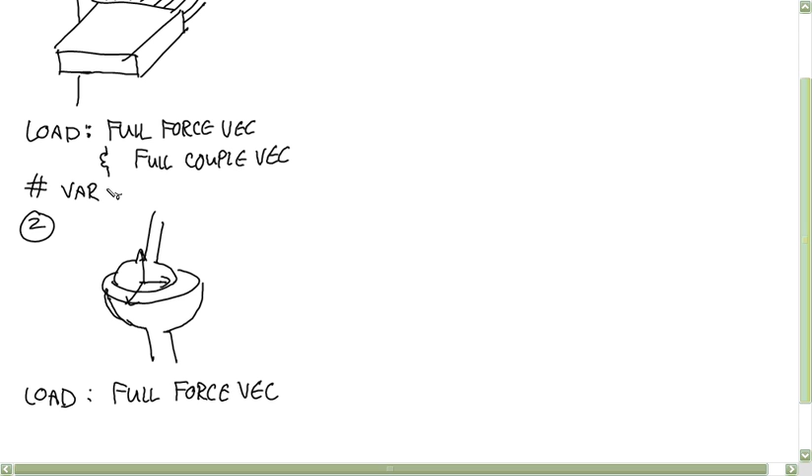So I skipped this step. For the fixed joint, how many variables do you need to represent that joint? Right. With the ball and socket, how many variables? 3. Right. Yep.

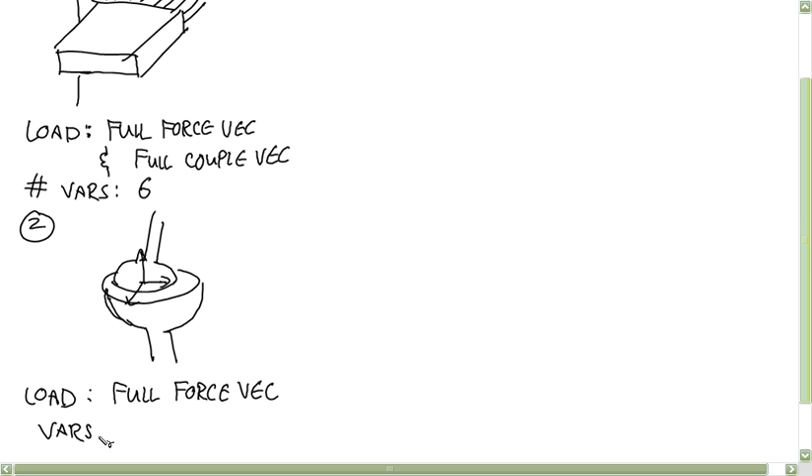So third, ooh, this one's hard to draw. Okay, it's supposed to be a hinge. Yeesh. You know, a hinge. Why don't I leave these ends off?

What do you think in this case? Full force vector and the couple? Yeah, you're thinking right on the right track. So it actually, so let's put a coordinate system here and think about what's prevented.

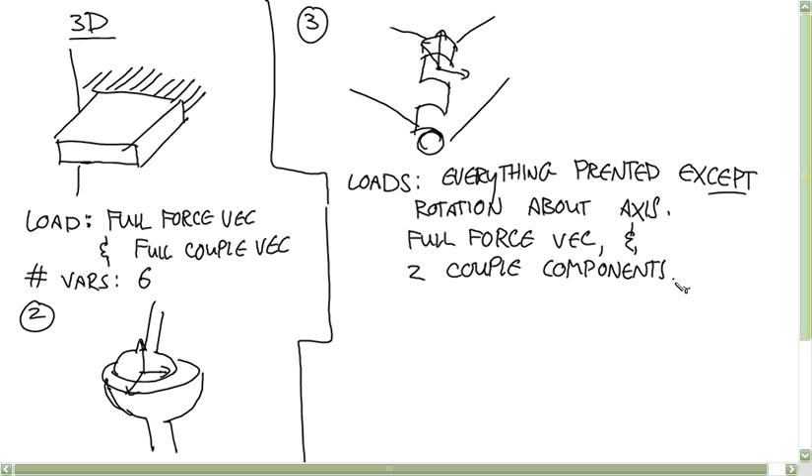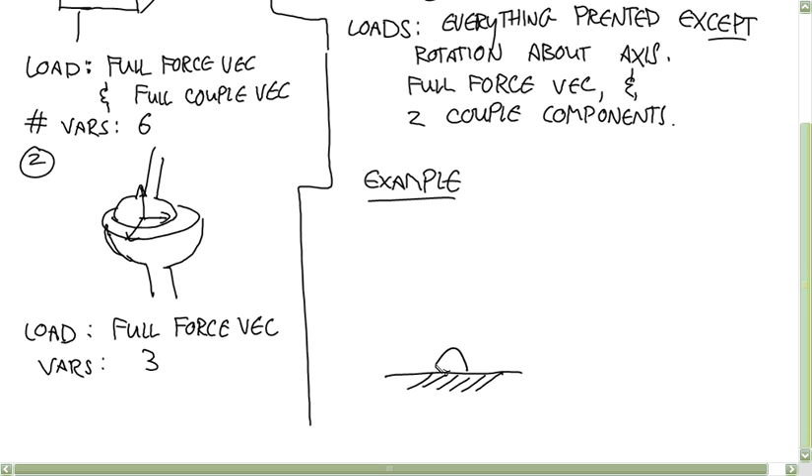Okay, so next time we'll get into this problem using what we've just talked about. So say that you have a body connected to a pin joint, and connected to a wall with a cable, and you're applying a 1,000 Newton force at that angle, okay? And we're going to calculate the reactions, which in this case mean the force vector applied by this cable and the reaction loads applied to this pin joint, okay?